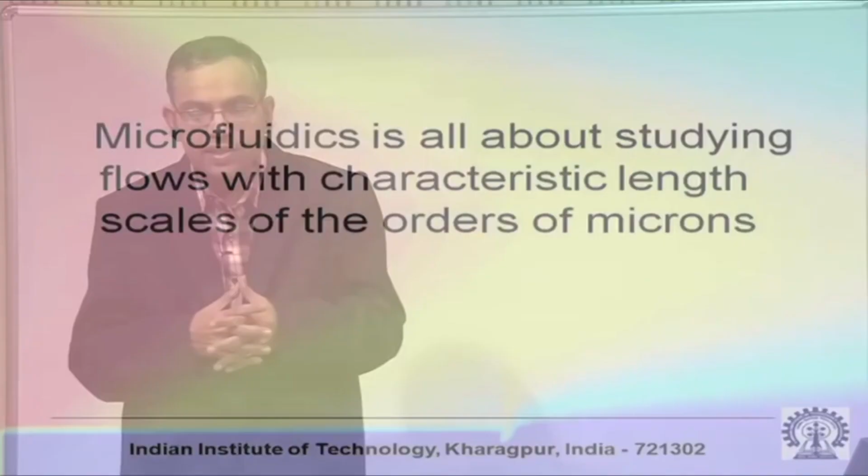Now, microfluidics is not a technical term as such, it is not a scientific term; it is sort of an interface between various subjects, and its interpretation depends on the manner in which you look into it. For example, microfluidics may have the name micro, but in terms of its scope it is like an elephant. It has a gigantic scope by itself.

Now, if somebody wants to say what an elephant is, somebody who knows only the tail of an elephant will say that the elephant is like a thread. So, obviously it depends on how you look into it. So, microfluidics being a multifaceted subject, its interpretation depends on how we look into it.

Now, although this is an interdisciplinary course, this course is being offered as a part of our mechanical engineering curriculum. So, we look into it from a particular perspective and accordingly describe microfluidics like this: microfluidics is all about studying flows with characteristic length scales of the order of microns.

So, what is a characteristic length scale? A characteristic length scale is a length scale over which characteristic changes take place. So, when we say that the characteristic length scales are of the order of microns, we essentially mean that these changes take place over length scales of the order of microns. Now, there is no great sanctity about microns; it could also be nanometers.

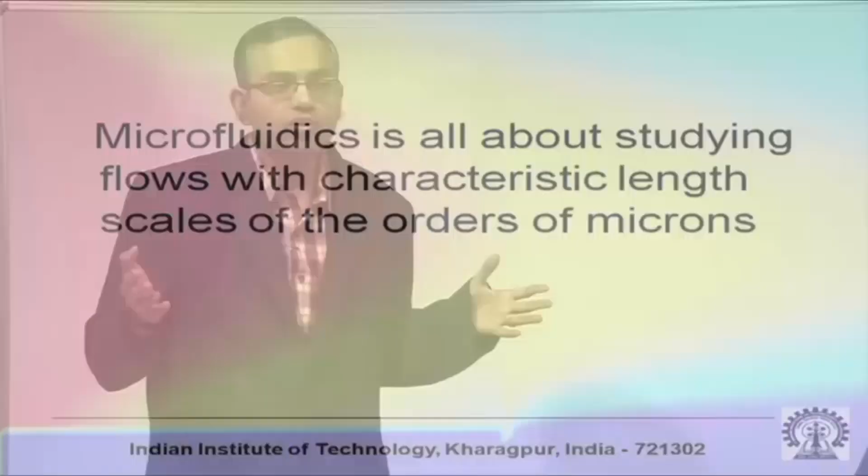So, the description of microfluidics I am giving is the way in which I, as a fluid dynamist, look into microfluidics. I will show you that microfluidics is an interdisciplinary subject, and it is not possible for an individual to know all its facets from all angles and all fundamental considerations, but we will briefly talk about all the facets.

So, when we say characteristic dimensions of the order of microns, as engineers we should have a feel of how thick or how thin these are. Typical dimensions of the order of microns are like dimensions of human hair. So, if you have a transparent substrate with a micro channel, it will look like a scratch to the naked eye.

So, microfluidic devices and their dimensions. If you look at this view graph, you will see that there is a wide range of dimensions of microfluidic devices. As I said, there may not be a hard and fast distinction between microfluidics and nanofluidics, and you can think of nanofluidic devices even of the order of angstroms.

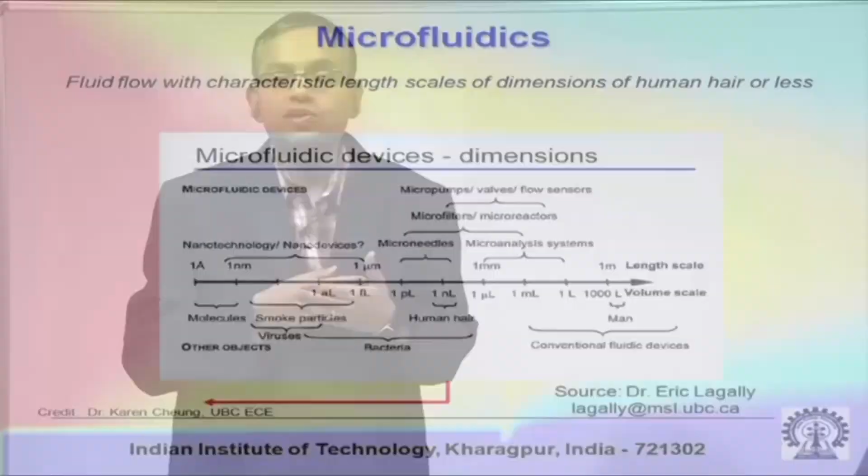It is not that engineering has made it possible to make those devices very effectively, but we have to understand that the whole advent of the subject microfluidics had come into the picture because of the advancement in micro and nano manufacturing or micro and nano fabrication processes, because many of the underlying scientific issues have been studied and have been reasonably well understood for a long time, but engineers could not translate those understandings in the forms of devices until and unless there has been a significant advancement in fabrication, micro fabrication and nano fabrication.

So, keeping that in spirit, fabrication over small scales will also be a part of this course. So, we will try to see how fabrication influences fluidics and how fluidics influences fabrication. These considerations we will come across.

Now, we can start with dimensions of the orders of angstroms to nanometers and micrometers, and then we can have large length scales where the microscale physics may not be that important, but we have an intermediate length scale where some effects of microscale are apparent, although not very significant.

For example, in engineering typically we talk about micro channels, nano channels. There is a terminology called mini channel. A mini channel is not micrometer dimension, but it is also not a macroscopic channel. So, it has its characteristic features somewhat in between the microscopic and the macroscopic channel. So, these are all terminologies. I am just trying to make you familiar with the terminologies, but keep in mind that these are not scientific terminologies. These are terminologies which have been coined by people to describe certain technologies.

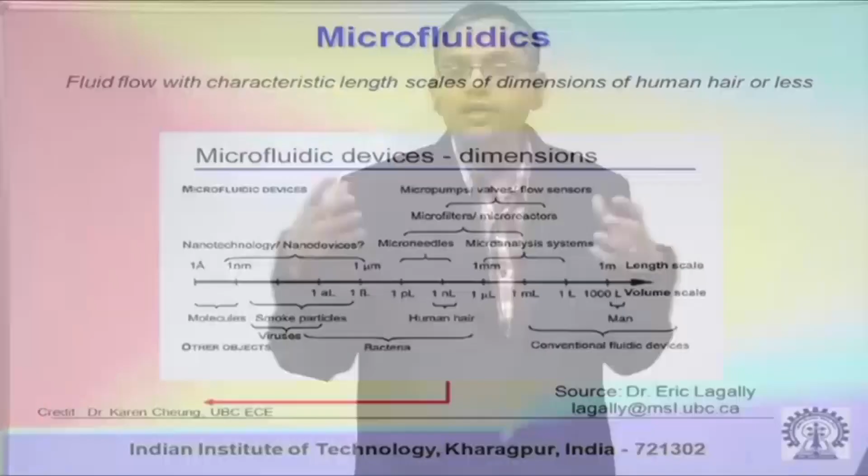So, if you are thinking of how these dimensions relate to real applications, when you talk of angstroms to nanometers, you think of molecular dimensions, and then nanometers to micrometers you have smoke particles, viruses, and over this regime you have nano devices, and the common buzzword nanotechnology is used for technological applications over these length scales of nanometers to microns.

At a little bit larger length scales, you think of other substances which closely relate to microfluidic devices, for example bacteria, and you can think of devices which are closely associated with these length scales, like microneedles, micro reactors, microfilters, microanalysis systems. So, these are many terminologies which are used for microfluidic devices.

Now, microfluidic devices are commonly associated with certain names. For example, many microfluidic systems are integrated in the form of a chip. So, it is like a credit card type of device on which you can have all operations of a laboratory like mixing, metering, valving, pumping, all these fluidic operations which you normally do in a processing industry, it may be chemical processing, biological processing, all these are miniaturized in the form of a small chip, and these types of devices are called lab on a chip or laboratory on a chip.

Many of these lab on a chip devices are used for certain chemical analysis or biotechnological or biomedical analysis, and these have alternative names as micro total analysis systems. And these names are so popular that, for example, there is a journal called Lab on a Chip, or you have a conference named MicroTAS. So, these names have become quite popular in the community.

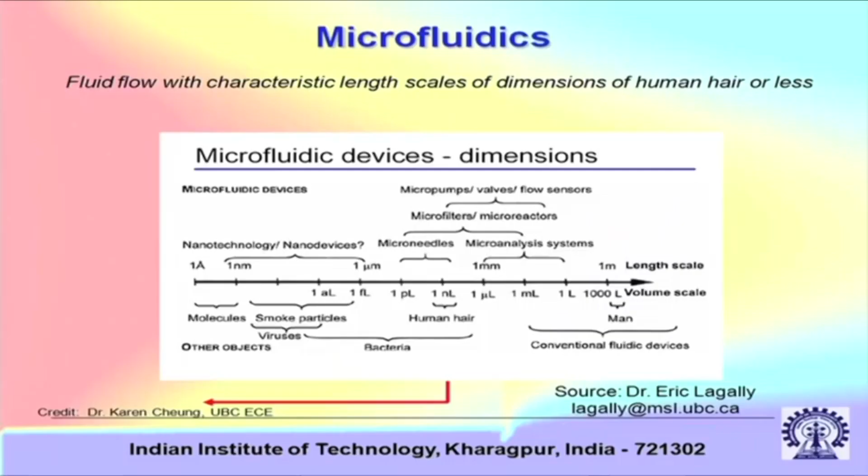Now, when we say microfluidics, all of you have a fair idea that these days micro and nanotechnology are very fascinating areas of research. These are very popular areas of research, not just in any specific country, but globally. The question is why we should go for microfluidic devices. What are the advantages that these devices are going to give us? Is it totally because of fashion, or are there scientific or technological interests in the background? So, here are some reasons why we go for miniaturization.

So, this is not true just for microfluidics, but for any devices where we intend to miniaturize the product. So, the first point is one can minimize materials and sample consumption. Why you can minimize the material consumption is because the device itself is small. Now, sample consumption, I will give you an example. Let us say that you want to perform a blood test. So, medical diagnostics is one of the applications which we will discuss briefly now and much more elaborately as we proceed in the course.

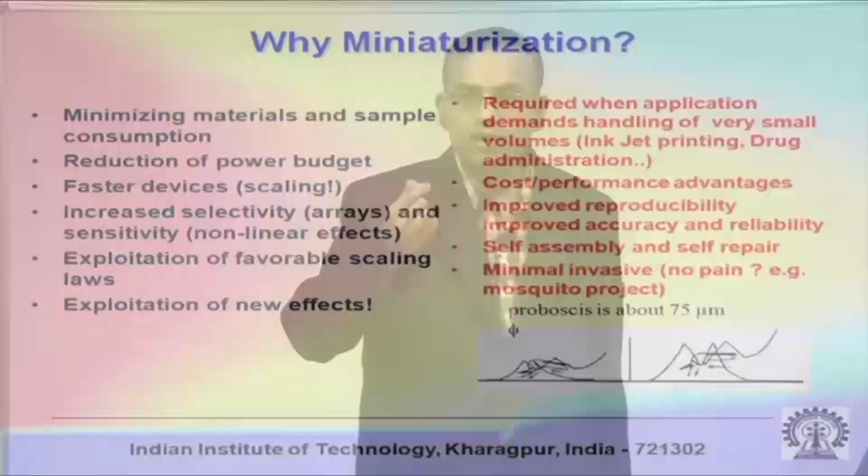Now, if you want to test a blood sample, if you have one drop of blood, then the amount of chemical reagents that are necessary to test the sample will also be small. On the other hand, if you have a large amount of blood as a sample, then you require a large volume of chemicals. So, we can see that in a miniaturized system you may require a small volume of the reagents to achieve the necessary task. Not only that, because of miniaturization one can run the device with low power. So, one can reduce the power budget.

Many of these devices operate fast because of favorable scaling over micro and nano scales. So, we will discuss how the different forces scale favorably as you reduce your dimensions. For example, if you reduce your dimensions, you will see that surface forces become more important. So, surface forces can help the transmission of fluid, which are otherwise active, but not so important over large scale systems. So, one can use that favorable scaling, increase selectivity and sensitivity with nonlinear effects, exploitation of favorable scaling laws which I have already explained, and exploitation of new effects.

When I say new, what I mean is effects which are not very intuitive over large scales; some of those effects may become important. So, keeping that in purview, we say that miniaturization is not always a fashion, many times it is essential. Not only that, miniaturization achieves something very practical: it makes the device small, it makes the device portable.

In fact, inkjet printers are sort of the first generation microfluidic products used in the industry. It was in the early 1980s that inkjet printers were introduced in the market, and in those days the subject was not known as microfluidics. It evolved as a subject by itself, but that was one of the technological revolutions so far as microfluidics is concerned. You can use small volumes for precise drug delivery. For example, if you want to administer a very small volume flow rate of drug very precisely to certain diseased cells, then you can use microfluidics.

Cost or performance advantages. In many cases, we want to use microfluidic devices because they are less expensive and they have some performance advantages by exploiting the science. So, microfluidics is located at a nice interface between science and technology. On one hand, the objective of studying microfluidics from an engineering point of view is to make new devices for certain applications, but these new devices have to be designed based on fundamental scientific principles which come from the basic principles of physics, chemistry and so on. So, it is at a nice interface.

Improved reproducibility, accuracy and reliability is what we expect to have in microfluidic devices, although there are issues to be addressed if we want to ensure this.

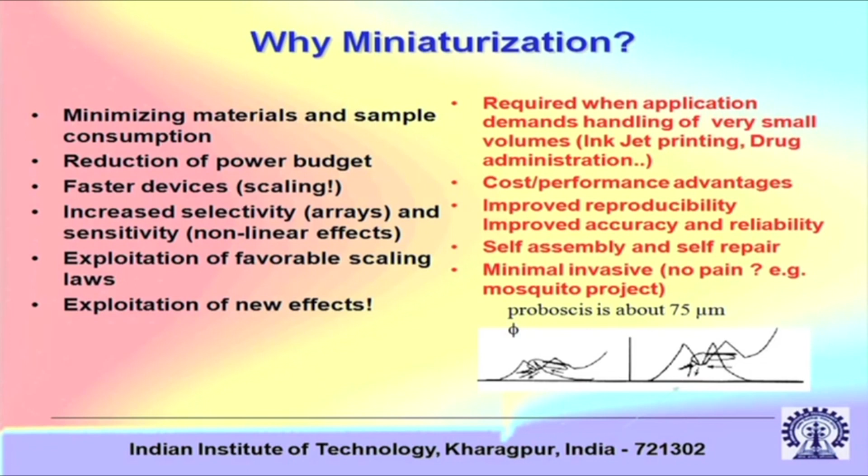Now, there are certain terminologies called self assembly and self repair which are closely linked with many of the microfluidic systems, although those are more associated with nanotechnology than with larger scale systems. And many of the microfluidic devices, for example, a microfluidic device for blood extraction, are not just functioning nicely because of the small scale effects, but they may also be minimally invasive with no pain. So, these are some of the features that we look for in microfluidic devices.

Now, I am teaching this microfluidics course to you, but I must confess that I am not a big expert in microfluidics, because microfluidics is interdisciplinary. It requires the agglomeration of so many disciplines that it is impossible for one individual to be an expert in the entire gamut of microfluidics. So, let me talk about the sort of specializations that are needed to address a microfluidics problem, and once you understand this, you will appreciate that any study of microfluidics is basically a team effort.

So, microfabrication: to study microfluidics you need to fabricate microchannels, or if you go down to even smaller scales, nanochannels. These are jobs of fabrication or manufacturing specialists. Chemistry: over small scales, surface chemistry can dictate the flow in a very interesting way. We will later address those issues and see how surface chemistry alters fluid dynamics. But for the time being, just take it that the chemistry of the surface can dictate the flow in a very interesting way. So, one requires chemistry.

Control systems. What we essentially mean is that, just like any engineering system, if you have a microfluidic system which executes certain tasks, many microfluidic systems are electromechanical systems, and a closely related, more generic area is micro electromechanical systems or MEMS. Sometimes we associate microfluidics very closely with MEMS, and in fact for many MEMS applications microfluidics appears to be a building block. So, in many of these systems you have to design a very nice control system for the system to operate efficiently, and control systems become critical.

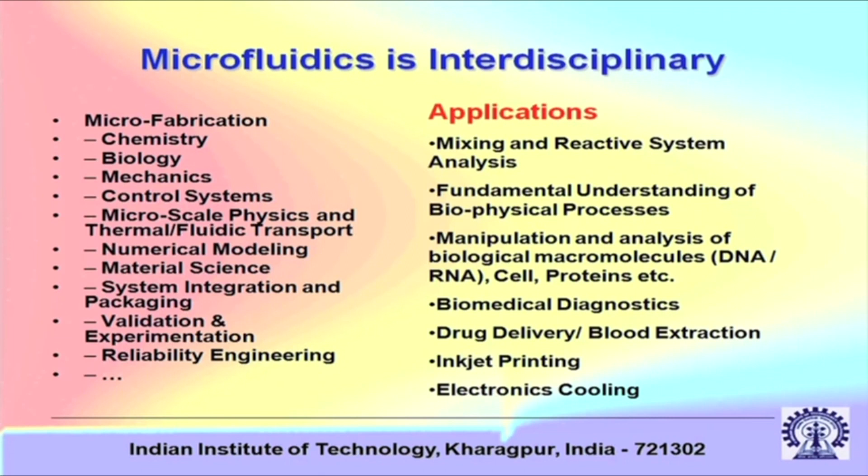Microscale physics and thermal fluidic transport, that is where we will mainly focus in this course. By microscale physics, what we mean is that it is not that all the equations you have learnt in your basic fluid mechanics will be invalid, but those equations sometimes do not take into consideration certain features which are not important at large scales, but as you scale down your system, those features are important and have to be taken care of. Numerical modeling.